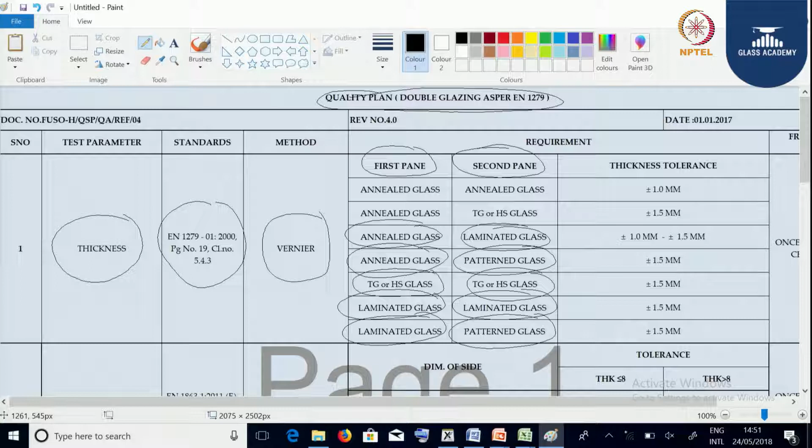As it is a double glazing unit, it consists of a minimum of 2 panes of glasses, the first pane and the second pane. The panes of glasses can be either annealed, toughened or HS, annealed or laminated glass, annealed or patterned glass, toughened or HS, toughened or HS glass laminated with laminated glass, or laminated and patterned glass. So the combination of panes can be any.

So here we need to understand thickness tolerance. When the glass is of annealed combination, the overall thickness allowed is plus or minus 1 mm. When the glass combination is annealed and toughened or HS glass, the overall thickness tolerance is plus or minus 1.5 mm.

When the glass combination is annealed and laminated glass, the thickness tolerance shall be plus or minus 1 mm to plus or minus 1.5 mm. When the glass combination is annealed and patterned glass, the thickness tolerance is plus or minus 1.5 mm.

When the glass combination is toughened or HS glass and toughened or HS glass, the thickness tolerance is plus or minus 1.5 mm. When the combination is laminated glass plus laminated glass, the thickness tolerance is plus or minus 1.5 mm. When the combination is laminated glass and patterned glass, the thickness tolerance is plus or minus 1.5 mm.

The frequency of testing shall be once every 2 hours or every changeover. Whenever there is a change of thickness, we need to recheck the thickness of the overall DGU.

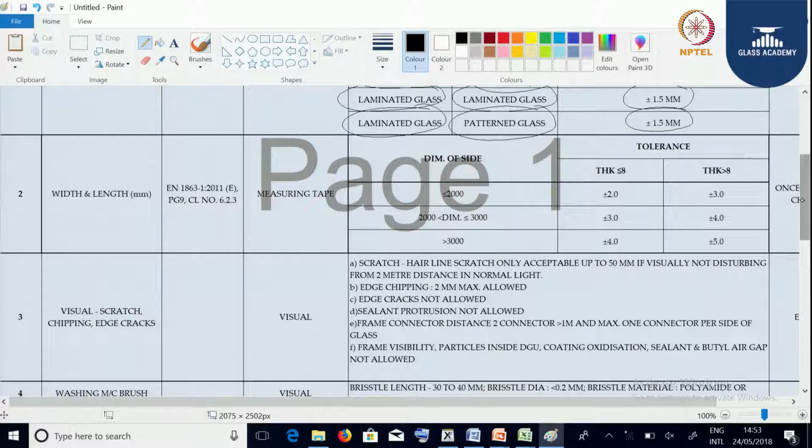Next, the second parameter is length and width. That is similar to the pre-process or tempering standard, EN1863 or EN12150. Visual inspections like scratches, chipping, and edge cracks are all applicable as per the pre-process and tempering standards.

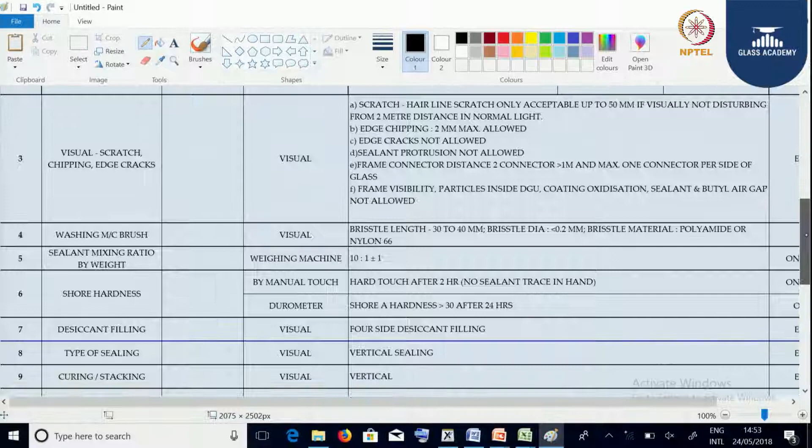Here we need to understand a few parameters, that is the washing machine brush quality. We need to check the sealant mixing ratio, measured with respect to volume and by weight, 10:1 plus or minus 1.

We need to check a few test parameters, like the shore hardness test. The tool we use is the shore hardness meter, or durometer as we call it, and if it is a single part component, we use the manual touch method.

Next we need to check the desiccant filling, and in a particular linear meter of spacer how much desiccant we need to fill, and in all edges we need to fill it. The type of sealing we are using, whether it is vertical or horizontal sealing. Curing, and what is the stacking, that we need to address.

What is the delta T, that is the temperature difference, that we need to understand, and everything will be undergoing through the lab tests that are coming in the later sessions.

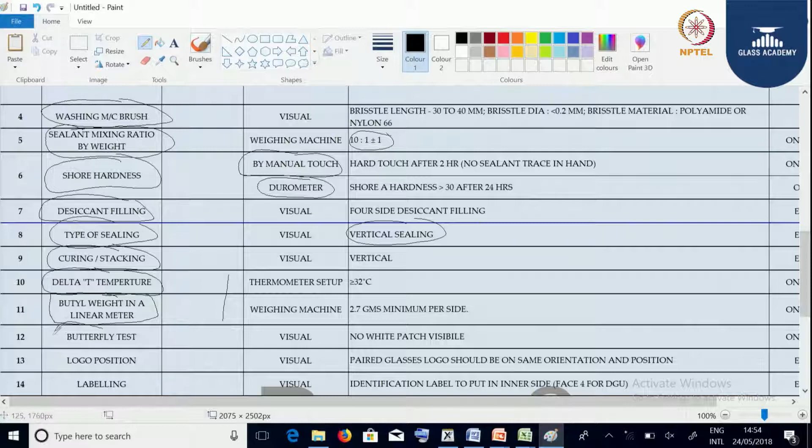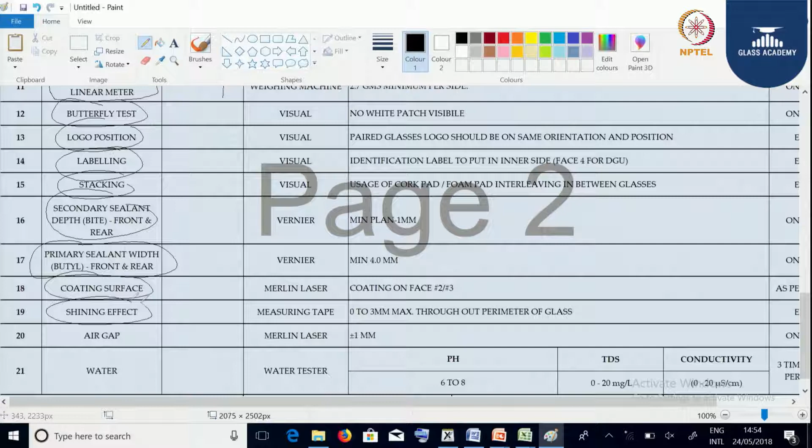We need to check the butterfly test. Next we need to see the secondary sealant depth. We need to see how we are stacking, what is the labeling position, what is our logo, where we are using the logo. Primary sealant butyl, how you are keeping it front and rear, coating surfaces, shining effect because of edge deletion, air gap, water - all these parameters we need to keep in mind when processing a double glazing unit.

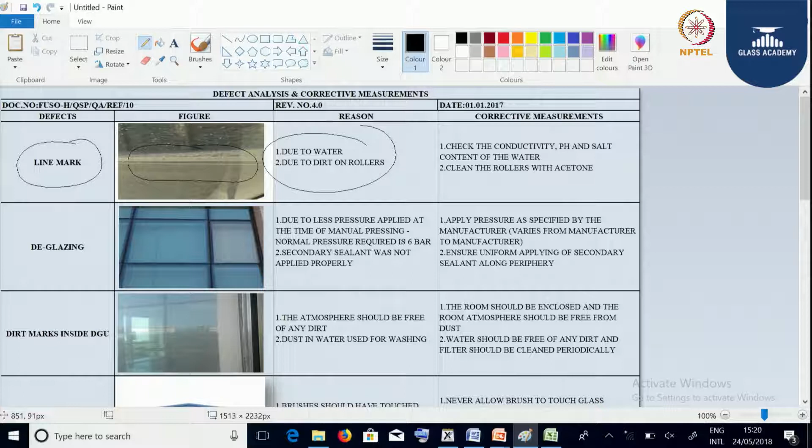Now we are going to see the defects that arise in the DGU process, that is double glazing unit. We can see the defect of line marks, meaning lining on the glass surface. The reason is poor water quality or dirt on the rollers. We can overcome this issue by checking water parameters like conductivity, pH and salt content, and cleaning the rollers with acetone on a regular basis.

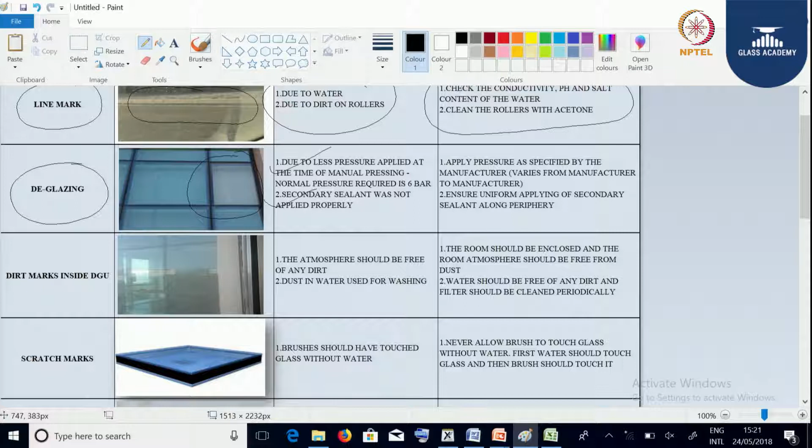Next defect is deglazing, meaning the two glasses got separated. You can see in the figure one of the glasses has fallen down. The reason is due to less pressure applied at the time of manual pressing - normal pressure required is 6 bar - and the secondary sealant was not applied properly. We can overcome these issues by applying pressure as specified by the manufacturer, and ensuring uniform application of secondary sealant along the periphery of the glass.

You can see the dirt marks inside the DGU in the figure. The reason being the atmosphere should be free from any dirt or dust, and the water used for washing should be clean. We can overcome these issues: the room should be clean and enclosed, room atmosphere should be free from dust, water should be free of any dirt, and the filter should be cleaned periodically.

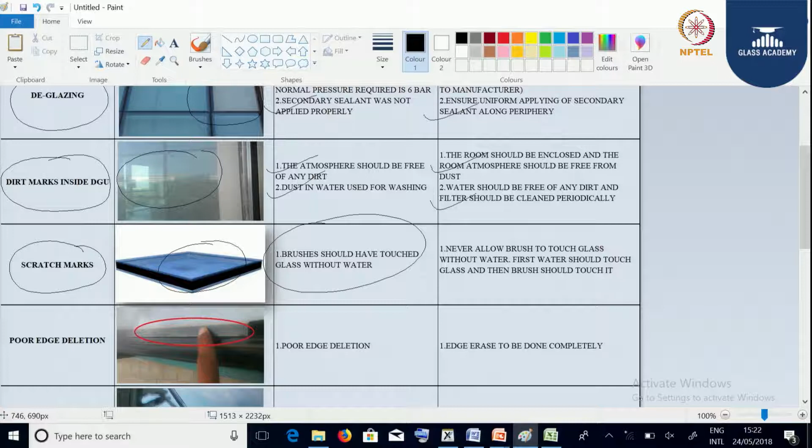Next you can see the scratches on the glass surface. This is because the brushes have touched the glass without water. We can overcome this issue by never allowing the brush to touch the glass without water. First water should touch the glass, and then the brush should touch the glass.

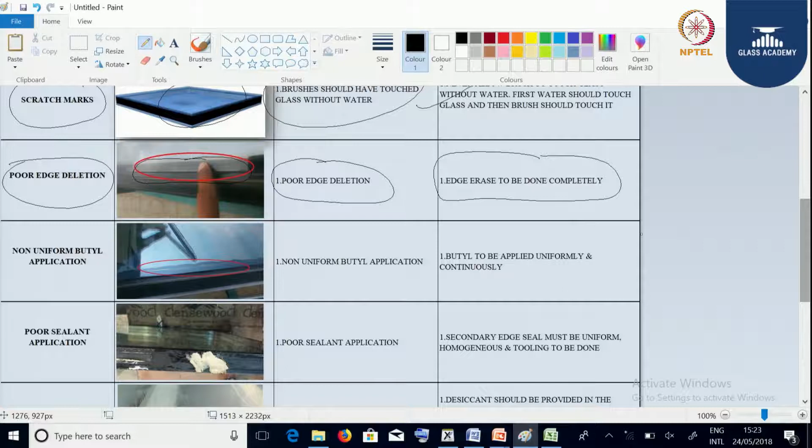Next one is poor edge deletion. You can see in the figure that the edge deletion we have done on the glass is not complete. If there is poor edge deletion, you can see traces of the coating. Our intention is that the coating surface should be completely removed and the surface should be as clear as plain glass. This happens because of poor edge deletion, and we can overcome this issue by properly doing the edge deletion with the proper wheel and proper pressure.

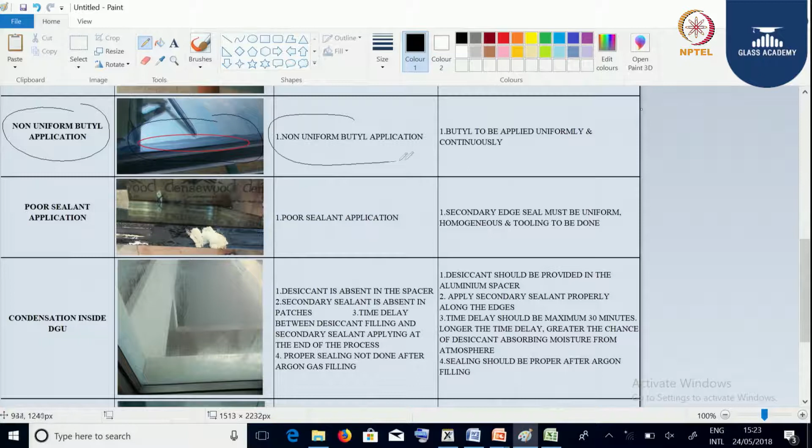Next one is the non-uniform butyl application. You can see in the figure the butyl is like a zigzag line. Always the butyl should be straight and continuous, since the butyl acts as a moisture barrier. The reason is the zigzag line, due to non-uniform butyl application, and we can overcome this issue by applying butyl uniformly and continuously.

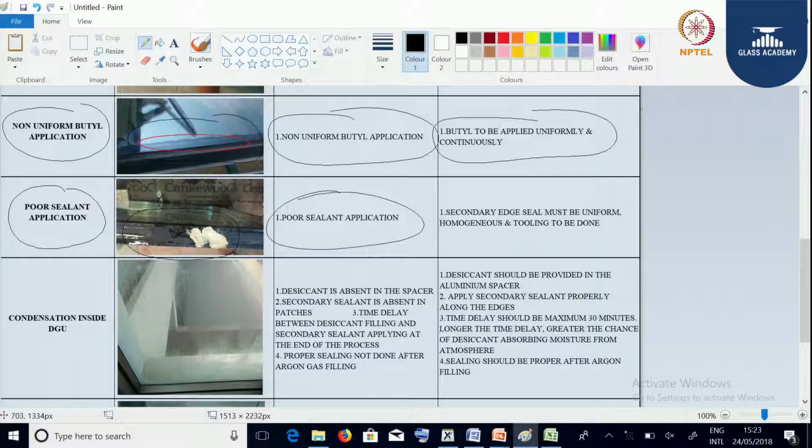Next defect we are going to get in the DGU is poor sealant application. You can see there is insufficient depth or a continuity missing in the sealant. The reason is poor sealant application. We can overcome this issue by maintaining a proper edge seal, ensuring uniformity, and tooling to be done once the pasting is done.

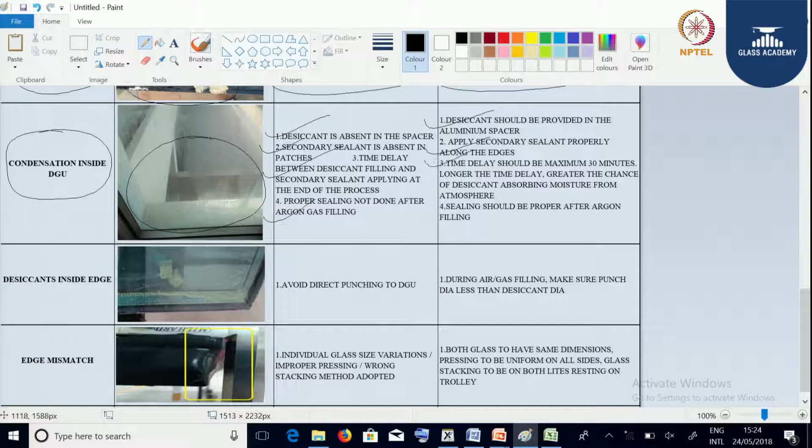Next defect we are going to get is condensation inside the DGU, that is, moisture trapped inside the DGU. The reasons are: desiccant is absent in the spacer, or secondary sealant is absent in patches, or there is a time delay between the desiccant filling and the secondary sealant applying at the end of the process, or proper sealing is not done after argon gas is filled. We can overcome these issues by ensuring desiccant is provided in the aluminum spacer, applying secondary sealing properly along the edges, keeping the time delay to a maximum of 30 minutes - the longer the time delay, the greater the chances of desiccant absorbing moisture from the atmosphere - and ensuring sealing is proper after argon gas is filled.

The next defect you are going to get is desiccants inside the DGU. You can see here the desiccants have fallen inside the DGU. The reason is direct punching to the DGU should be avoided. Generally whenever we go to any glass having desiccant inside, the major cause is that the DGU got drilled, so we need to avoid direct drilling of the spacer. We can overcome this issue by air or gas filling, and making sure that the punch diameter is less than the desiccant diameter.

Next defect you can see is the edge mismatch. You can see with the right angle there is an offset of the edge in the figure. The reason is individual glass size variations, improper pressing, or wrong stacking method adopted. You can overcome this issue by ensuring both glasses have uniform dimensions, pressing is uniform on all sides, and glass stacking is uniform, resting uniformly on the trolley.

So now we will be starting the various tests that are applicable for an insulating glass unit. Let us start with the butterfly test. The butterfly test we perform on secondary sealant. The secondary sealant is available in three forms in the market: insulating glass unit, structural glazing unit, and weathering sealant.

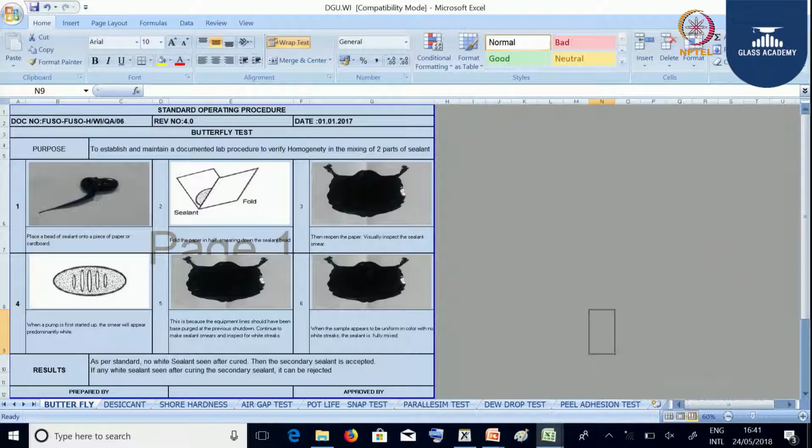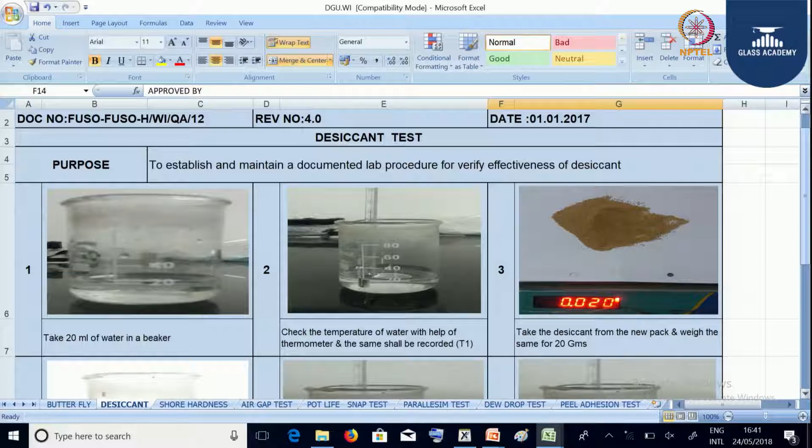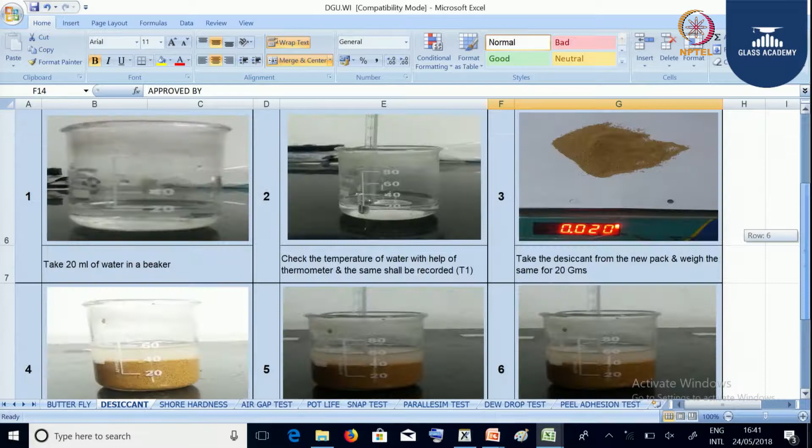Next is the desiccant test, used for the desiccant inside the spacer that absorbs moisture. First we take 20 ml of water in a beaker and measure its temperature. Then we take 20 grams of desiccant and pour it into the water, checking the temperature after the desiccant is added.

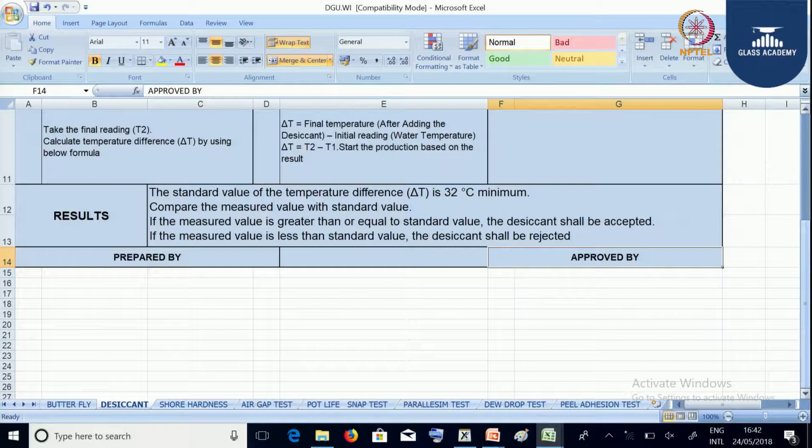Within a fraction of seconds, the temperature will rise. Then we calculate the temperature difference: the temperature after adding the desiccant minus the initial water temperature gives the desiccant temperature. It should be a minimum of 32 degrees centigrade, which is the standard acceptable value.

Next, the shore hardness test, used to check the hardness of the secondary sealant. The procedure is to take a 2-part sealant into a 100 by 100 mm square plate with a 10 mm thick layer, apply the secondary sealant over that 100 by 100 mm area, and after 24 hours of production, check the hardness.

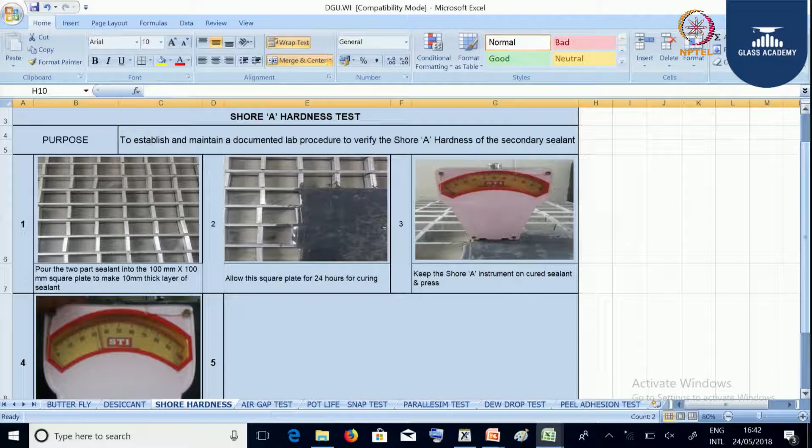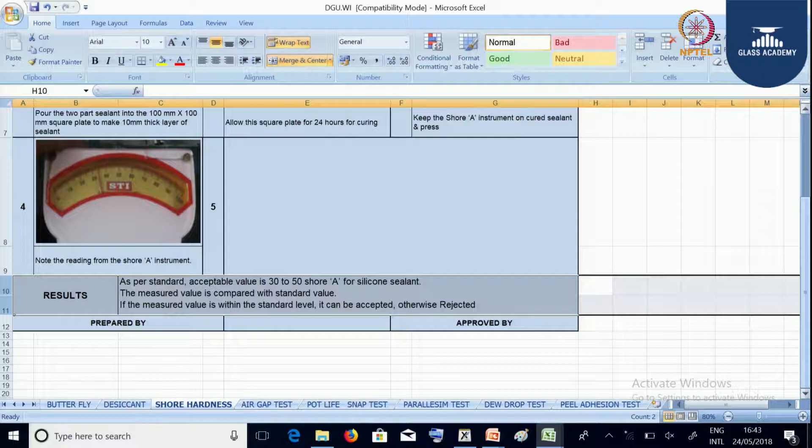We keep the shore hardness tester on the sealant and measure the reading. If you get more than 30, it is a good sealant. As per the standard, the acceptable value is 30 to 50 shore for secondary sealant. If the value is below that, it still requires curing, and if higher, there's a chance the sealant becomes sticky. Secondary sealant should act like a rubber material.

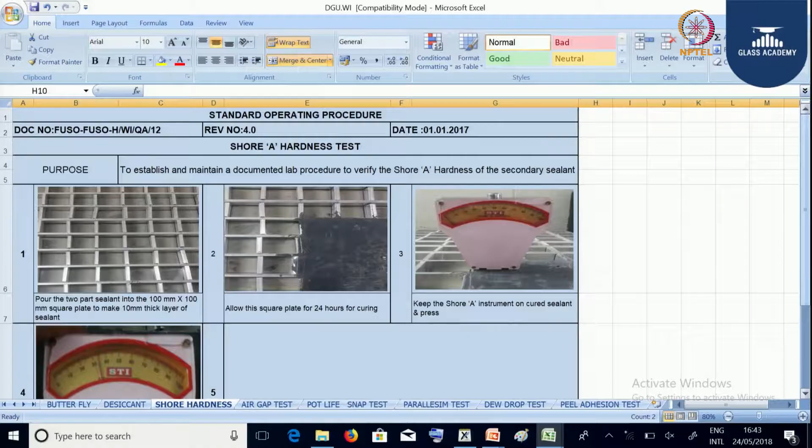Next is the pot life test, also known as the snap test. This test is done to check the curing. The snap time determines the curing time and curing rate, and this test is used to establish that.

The procedure is: first we take a cup, apply sealant inside it, and insert a spacer into the cup. We try to remove the spacer every 5 minutes. At a particular time, it will not come out.

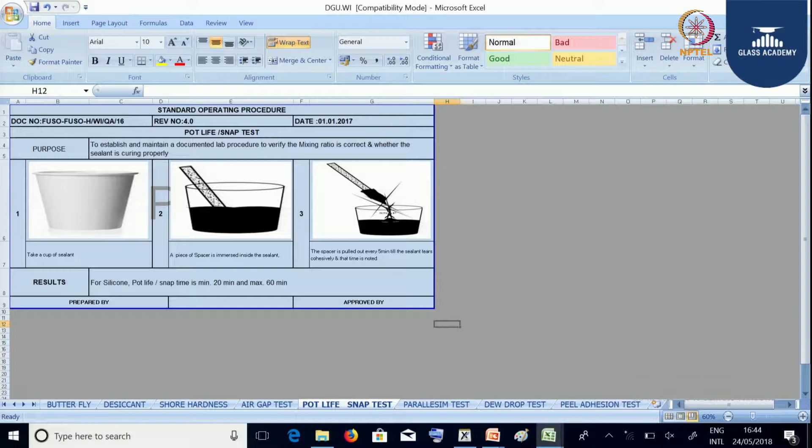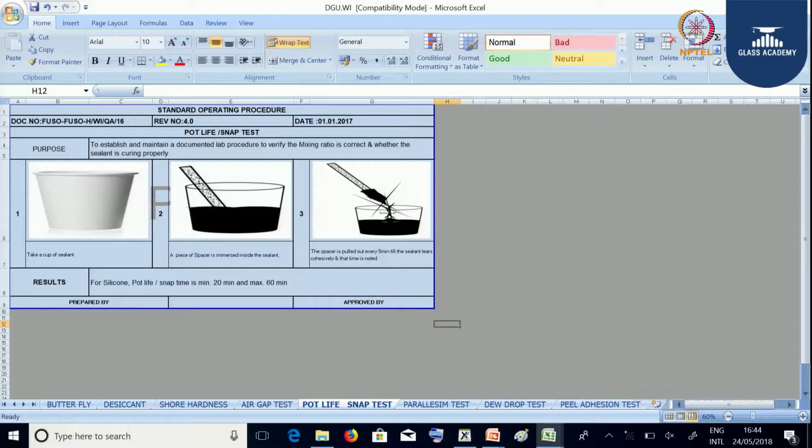We need to check whether it is a cohesive failure or adhesive failure, and at what time. If it is tearing within itself at a particular time, we note that time down. For silicone, the snap time should be a minimum of 20 minutes and a maximum of 60 minutes. Basically, the snap time determines the curing time between the glass and the spacer.

Next is the parallelism test, used to measure the overall thickness of the DGU. We place the DGU vertically and measure the thickness of the glass at the edges or at the center of the four edges.

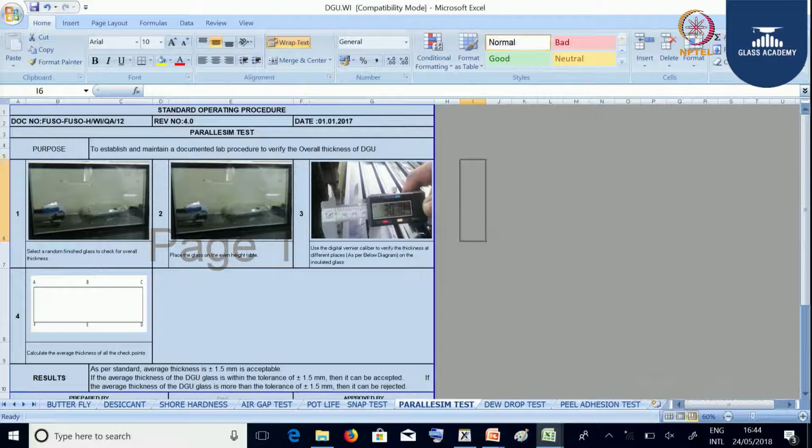Generally, the thickness of the glass includes the individual glass thicknesses and the air gap the DGU covers. As shown in figure 4, we measure the overall thickness at points A, B, C, D, E, F. As per the standard, the thickness difference shall be plus or minus 1.5 mm, which is acceptable.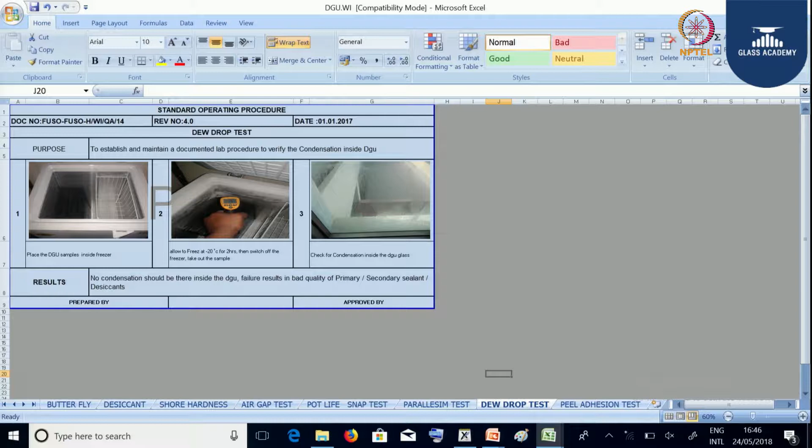So for the dewdrop test, we need to find out 3 things. In the result, no condensation should be there inside the DGU. Failure shall result in bad quality of the primary sealant, secondary sealant, and the desiccants.

Now we'll understand the tests performed for the insulating glass unit or double glazing unit. Generally, a double glazing unit is a combination of two glasses with an air gap in between. As we assemble two glasses with the air gap, the DGU glass acquires insulation properties with respect to heat and sound, thereby giving energy conservation parameters.

In insulating glass, apart from the glass itself, there are many components which make up the DGU glass. Now we'll understand each one, its importance, and how all these parameters contribute to the combination of DGU, helping in durability and performance.

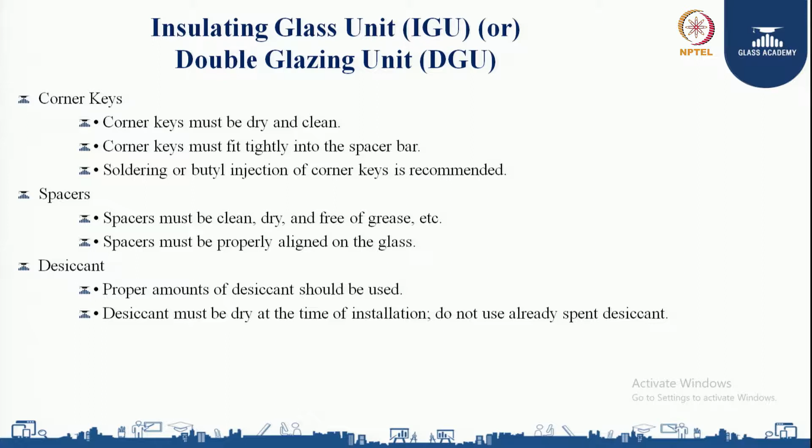Glass: the glass surface must be properly cleaned and free from fingerprints. Proper maintenance of glass cleaning equipment and solution is essential. Glass lites should have no edge defects or inconsistencies, and must be properly aligned with the spacer.

Now let us understand PIB, polyisobutylene, the primary seal. The primary seal must be applied in a continuous, uninterrupted bead free of voids or skips. No excess PIB should protrude into the secondary seal cavity. The primary seal must be uniformly and sufficiently pressed to give an even thickness and good adhesion to the glass and spacer surfaces.

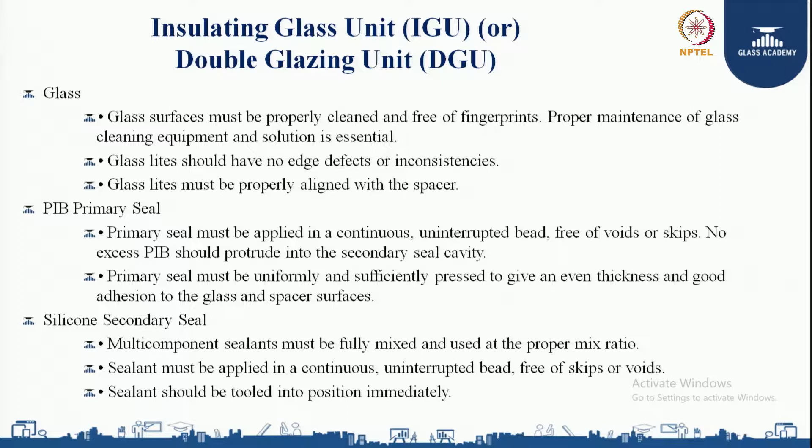Silicon, the secondary seal: multi-component sealants must be fully mixed and used at the proper mixing ratio. The sealant must be applied in a continuous, uninterrupted bead free of skips or voids, and must be tooled into position immediately.

Now we'll see what is meant by bite. Bite is the area that has to be edge removed, or the depth of the silicon. The bite gives structural strength with respect to wind pressure, thermal deflection, and dead load or self-weight of the glass. So basically the silicon gives structural strength to the DGU product.

Now this is how we calculate the bite. Using the appropriate mathematical derivation, the following calculations determine the structural sealant bite, which holds the IG unit to the curtain wall mullion. Structural sealant bite, in inches, equals half of the smallest leg of the largest lite, times wind load, divided by sealant design strength. For IGU sealant bite, it is 50% of half of the smallest leg of the largest light, times wind load, divided by sealant design strength. This is the formula for the sealant bite calculation with 50 by 50 load sharing.

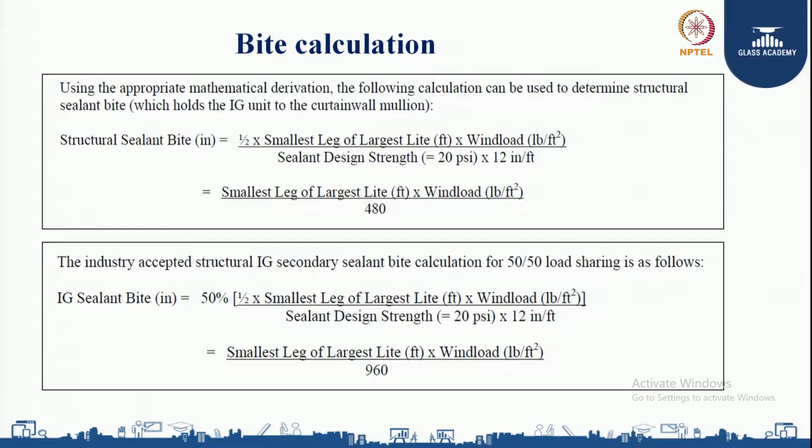Now we'll understand each test one by one, what we do in DGU glass.

Butterfly test. When you talk of a secondary sealant, it is the sealant we use to make the insulating glass unit. It is a two-part component, a mixture of base and hardener. So we need to have a proper mixing of the base and hardener, and that is ensured through the butterfly test. The purpose of the butterfly test is to verify the homogeneity in the mixing of the two parts of sealant.

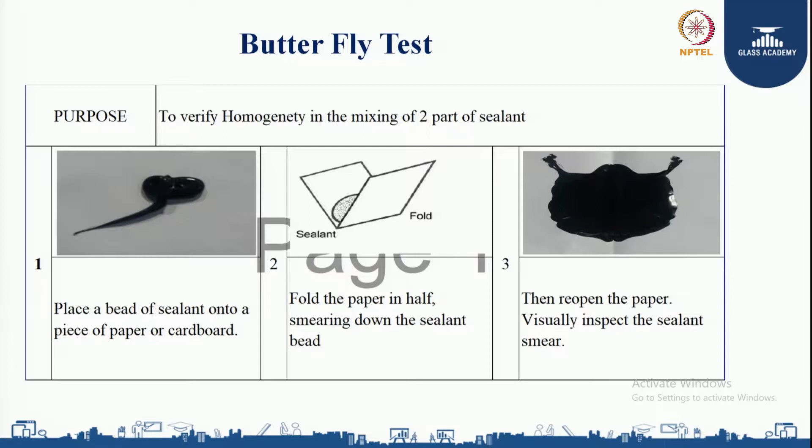Place a bead of sealant onto a piece of paper or cardboard, then fold the paper in half, smearing down the sealant bead, reopen the paper and visually inspect the sealant smear. When a pump is first started up, the smear will appear predominantly white, because the equipment lines should have been base purged at the previous shutdown.

Continue to make sealant smears and inspect for white streaks. When the sample appears uniform in color with no white streaks, the sealant is fully mixed. The butterfly test should be performed with multi-component sealants at least every time a pump is started, if not intermittently throughout the day's production. As per the standard, if no white sealant is seen after curing, the secondary sealant is accepted. If any white sealant is seen after curing, the secondary sealing is rejected.

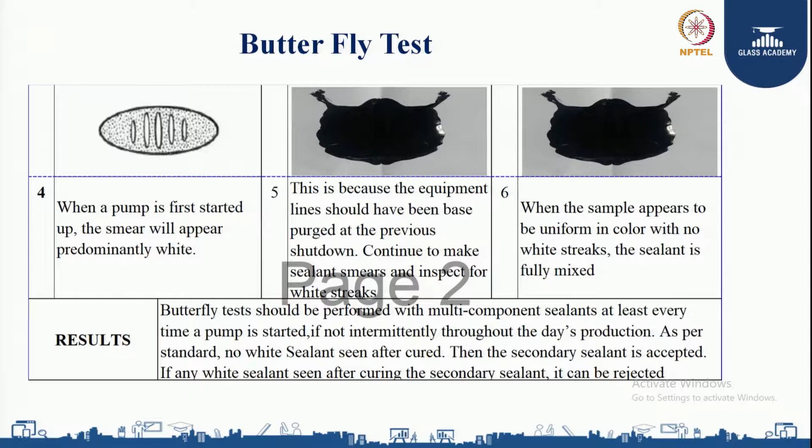Next is the desiccant test or molecular sieve test. The purpose of this test is to establish and maintain a documented lab procedure for verifying the effectiveness of the desiccants. The purpose of desiccant is to absorb the moisture inside the DGU.

In order to check whether the desiccants are in a position to absorb the moisture or not, first we take 20 ml of water in a beaker. Then the temperature of the water is checked with the help of a thermometer. It is recorded as T1.

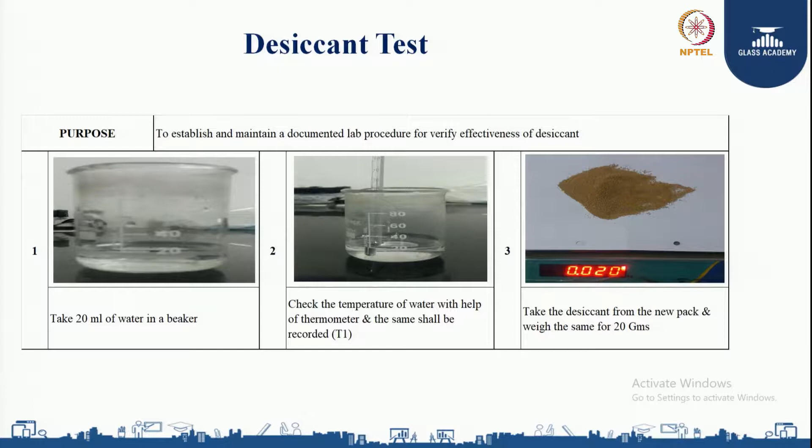Then we need to take desiccants weighing 20 grams. Immediately add these desiccants into the water and mix well. The temperature should rise more than 50 degrees centigrade within 2 to 3 seconds. Take the final reading, that is T2. Calculate the temperature difference using the formula: delta T equals the final temperature after adding the desiccants minus the initial water temperature, that is delta T equals T2 minus T1.

Start the production based on the result. The standard value for the temperature difference is 32 degrees centigrade minimum. Compare the measured value with the standard value.

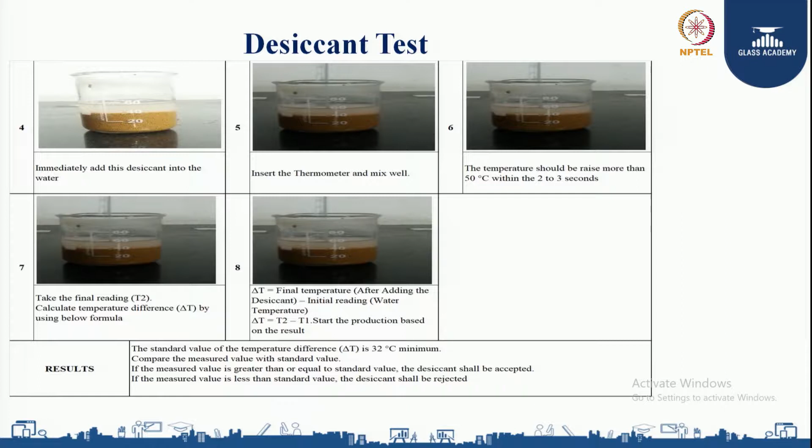For example, if my room temperature is 25 degrees centigrade and my desiccant temperature comes to 75, then 75 minus 25 gives delta T of 50 degrees centigrade, and the minimum required is 32 degrees centigrade. If the measured value is greater than or equal to the standard value, the desiccants shall be accepted as being in a position to absorb moisture. When the measured value is less than the standard value, the desiccant shall be rejected.

Next is the shore hardness test. Through this test, we are ensuring the hardness of the secondary sealant. The purpose of this test is to check the hardness of the secondary sealant. What we do is pour the two-part sealant into a 100 mm by 100 mm square plate to make a 10 mm thick layer of sealant.

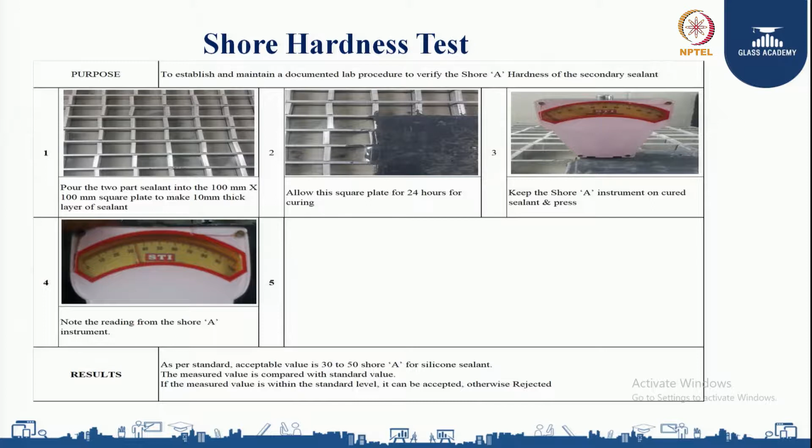Allow the square plate 24 hours of curing. Keep the Shore A instrument on the cured sealant and press, then note the reading from the instrument. As per the standard, the acceptable value is 30 to 50 Shore A for silicon sealant. The measured value is compared with the standard value. If the measured value is within the standard level, it can be accepted; otherwise, it is rejected.

Next test is pot life or snap test. This test is performed to verify the mixing ratio is correct and whether the sealant is curing properly. The procedure is, first take a cup of sealant, then immerse a piece of spacer inside the sealant. The spacer is pulled out every 5 minutes until the sealant tears cohesively, and the time is noted. For silicon, the pot life or snap time is minimum 20 minutes and maximum 60 minutes. So through this test, we are ensuring the curing time.

Next is the parallelism test. The parallelism test is used to check the overall thickness of the DGU.

As the DGU is a combination of two glasses with the aluminum spacer, we need to ensure the overall thickness of the DGU, and that we are going to ensure through parallelism test. First, we take a DGU finished product and place it vertically.

Then using the digital vernier caliper, we measure the thickness at the center of the 4 edges. As we can see in the figure, A, B, C, D, E, F, we take the average thickness. As per the standard, the allowed average thickness tolerance is plus or minus 1.5 mm. If the average thickness is within this tolerance, it is accepted; if more, it is rejected.

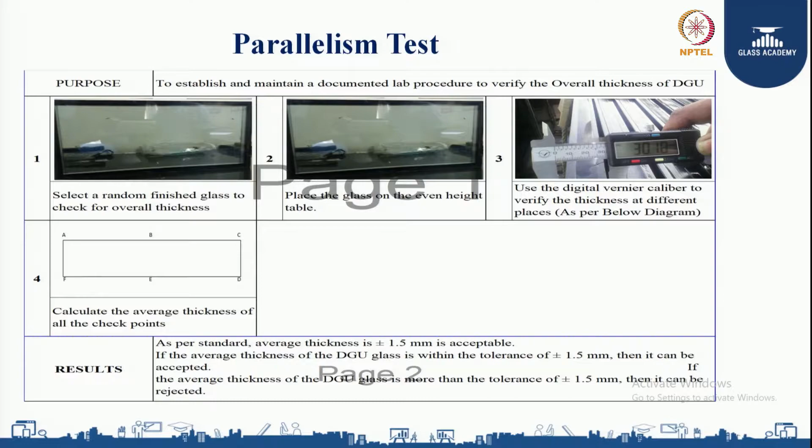Next is the dew drop test, which we do to check the condensation inside the DGU.

We take a DGU sample and keep it inside the freezer at minus 20 degrees centigrade for 2 hours, then take out the DGU sample from the freezer and check for condensation.

Condensation can happen either on the outside surface, inside surface, or in between the DGU. Outside or inside condensation can be wiped out, whereas condensation in between the DGU is not okay. In that case, we need to check the primary sealant continuity, secondary sealant curing and hardness, and whether the butyl and desiccant are able to absorb the moisture. There should be no condensation inside the DGU for it to pass.

Failure results from bad quality of primary sealant, secondary sealant, and desiccant. You can see in figure 1 the DGU glass placed inside the freezer, where it is frozen at minus 20 degrees centigrade for 2 hours, then taken out to inspect for any condensation inside the DGU.

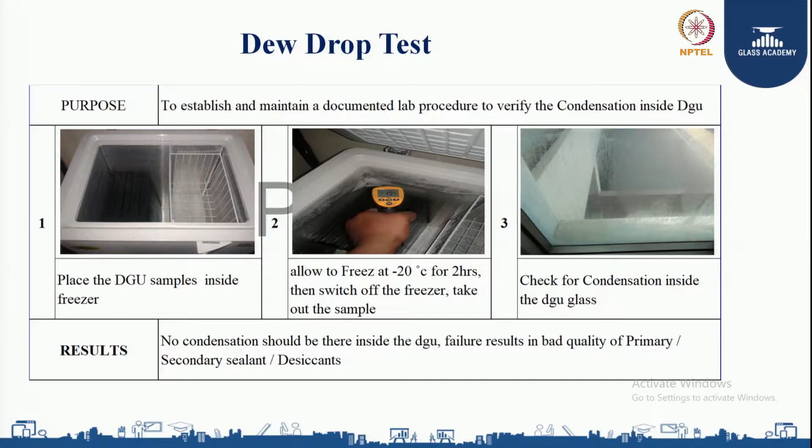Next is the silicon peel adhesion test. Its purpose is to ensure the bonding or adhesion between the glass, silicon, and the spacer, so that the sealant gives acceptable adhesion to the glass and spacer surfaces.

The procedure is to apply a bead of silicon sealant to the clean spacer surface, allow the sealant to cure for a specified time, then pull out the sealant and visually inspect the mode of sealant failure.

You can see in the figure, when I try to pull back at 180 degrees, the sealant separates from the glass sample - this is an adhesive failure. In figure B, there is a cohesive failure where the sealant tears within itself.

An adhesive failure is a bad sign, whereas a cohesive failure is recommended. In the results, cohesive failure - where the sealant tears within itself and remains adhered to the substrate - is desirable versus adhesive failure, where it completely pulls away from the substrate.

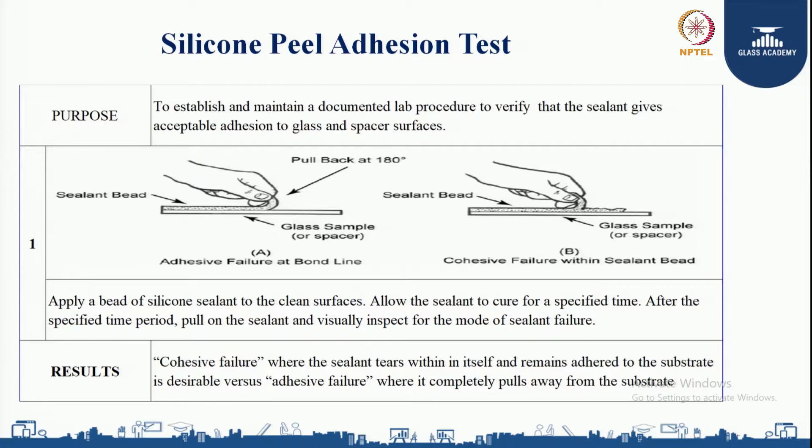Next test is the glass thickness test and air gap test. As the DGU glass is a combination of minimum 2 glasses with an air gap, the air gap tester helps us determine the thickness of individual panes as well as the air gap in between the DGU.

With the help of the Merlin laser air gap tester, we place the equipment on the glass surface to identify the measurements. I place this equipment on the DGU glass, and once I press the button, I get a minimum of 4 lights which indicate surface 1, surface 2, surface 3, surface 4.

When measuring from the first line from right to left: the first line to the second line indicates the glass thickness, the second line to the third line indicates the air gap between the DGU, and the third line to the fourth line indicates the second glass thickness.

So through this air gap tester, you can check glass thickness as well as the air gap inside the DGU. This equipment can also measure the coating surface, and if any PVB layer is present, that can be traced through this equipment too.

If it is a single glazing unit, you get 2 surfaces, thereby 2 lines. If it is a double glazing unit, you get 4 surfaces, thereby 4 lines. If it is a laminated DGU, you get 6 surfaces, thereby 6 lines. If it is a double lami DGU, you get 8 surfaces with 8 lines. This is how you trace out the glass thickness as well as the air gap inside the DGU. This concludes all the tests that we do for a DGU glass make.

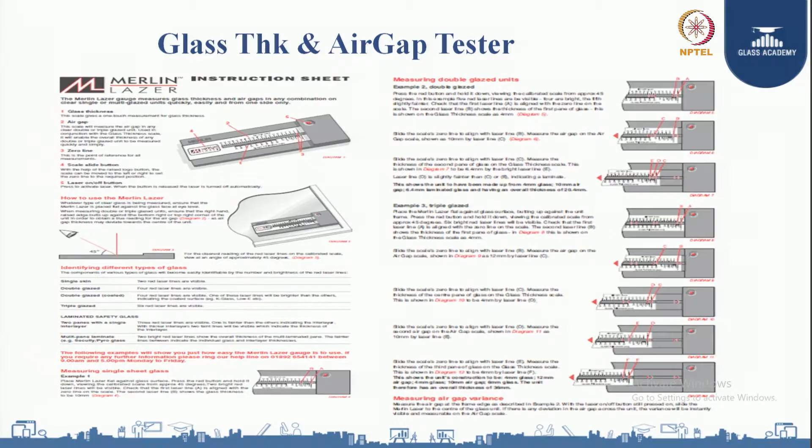Now, as we are using silicon, we have 3 types: structural silicon, insulating silicon, and weathering silicon. The silicon used in architectural systems is the insulating glass silicon.

This is a 2-part component, a mixture of base and hardener. This is known as the butterfly test, which determines the mixing ratio and homogeneity between the base and hardener. We take a paper and a small quantity of silicon, fold it, and properly squeeze it.

If we open it, this is how a butterfly test looks. By the shape itself, we can say it is a butterfly, like the wings of a butterfly. We need to check for any white patches inside the mixing. If there are white patches, the mixing is not okay. If there are no white patches, the mixing is okay.

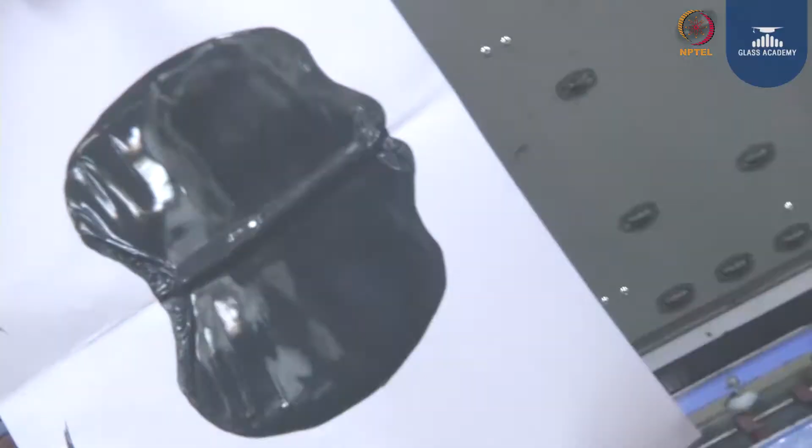We have one more test known as the skin over test. By placing your finger on the silicon, if you are able to feel the wetness after 2 hours, we need to inspect. If it is still sticking after 2 hours, there is a mixing ratio issue. If it is not sticking, the test passes.

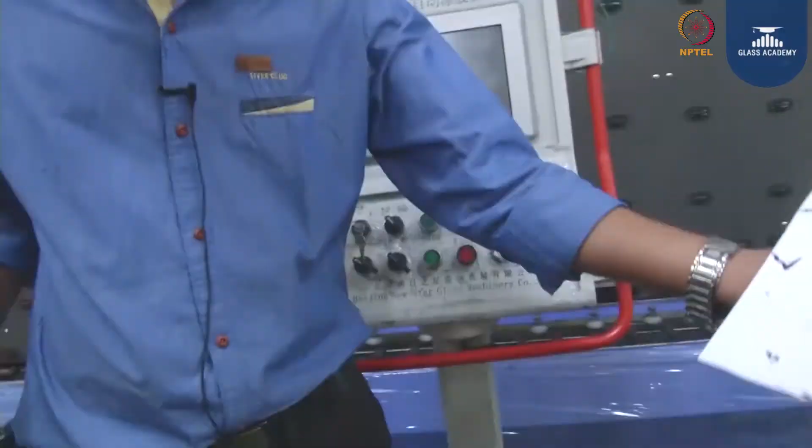This is one more test known as the pot life or snap test, where we take a cup and keep silicon inside it and immerse the spacer. Every 5 minutes we try to pull out this spacer, and at a certain time it will break cohesively.

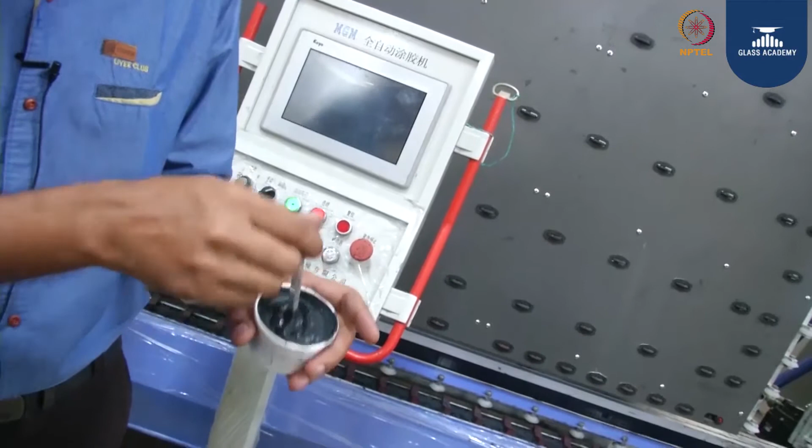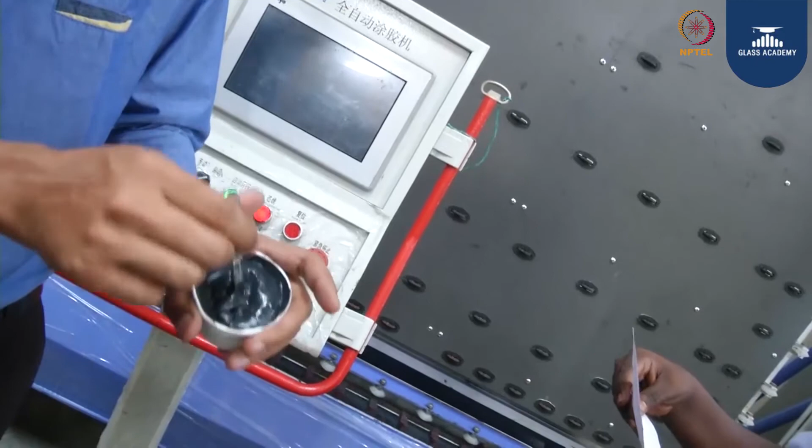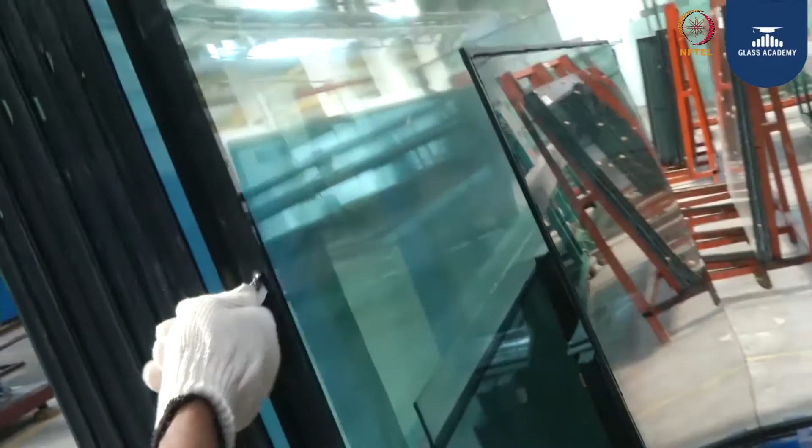Now we are going to do one more test known as the silicon peel adhesion test. This determines the bonding or adhesion between the silicon glass and the spacer. We cut a piece of silicon and try to pull it out. If the silicon comes completely off, that indicates weak bonding. If it comes off cohesively, breaking within itself, that indicates good bonding.

Now if you see here, it is not completely removed. Part of the silicon is still sticking to the glass as well as the spacer. This is known as the silicon peel adhesion test.

The silicon should always have an elongation property. When we cut it, it does not come off directly. Some part of the silicon is still adhering to the glass and the spacer. This shows that the bonding between the glass, spacer, and silicon is good.

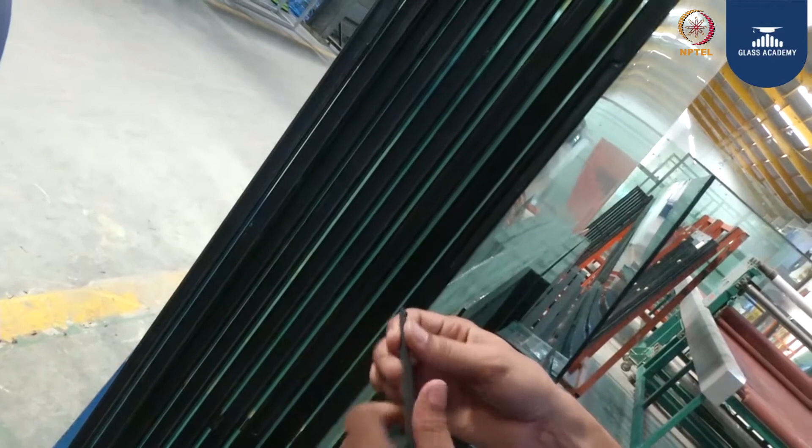Now you see, it is breaking like this, so there is no spacer visibility. As long as there is no spacer visibility and the silicon is sticking to the glass and the spacer, the silicon is of good quality.

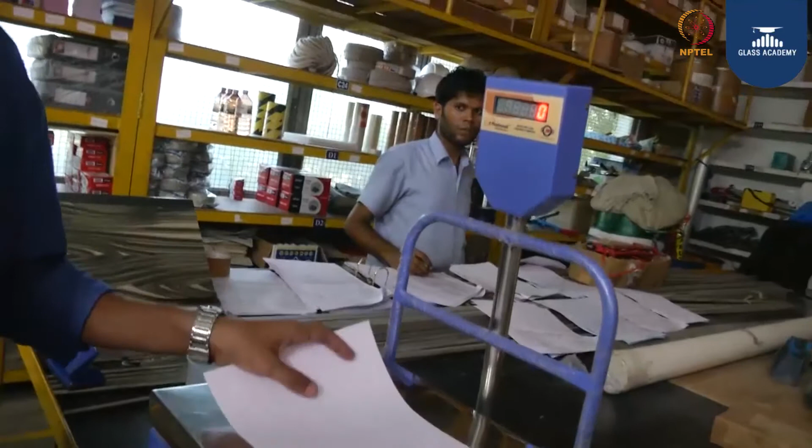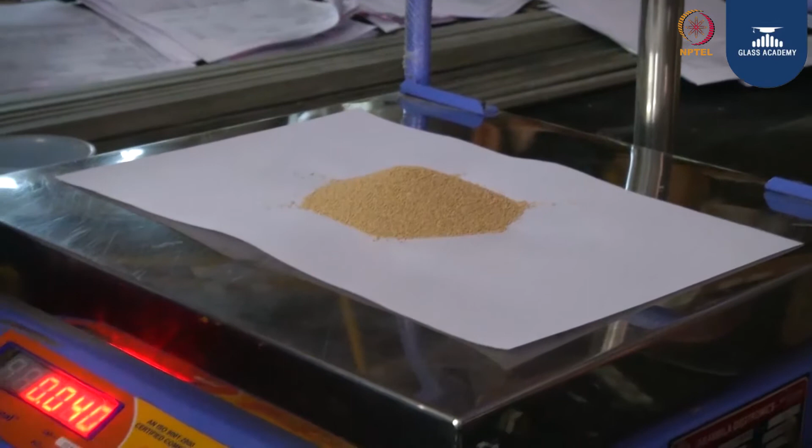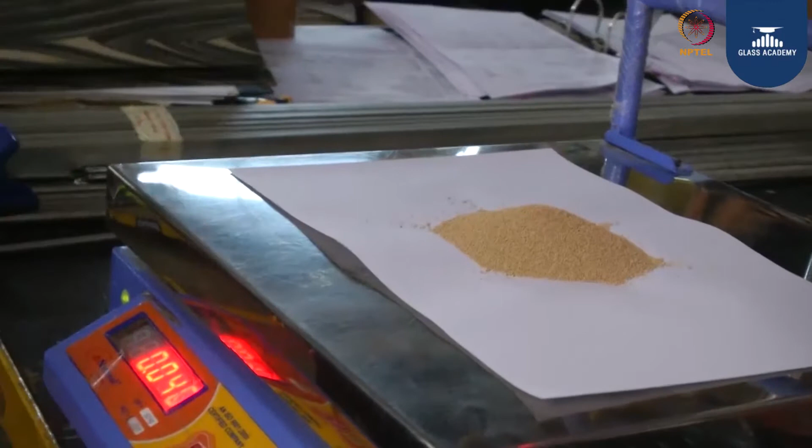Now we are going to perform a test known as the desiccant test or delta T test. We are going to take 40 ml of water and 40 grams of desiccants. With the help of a thermometer, we are going to measure the temperature of the water.

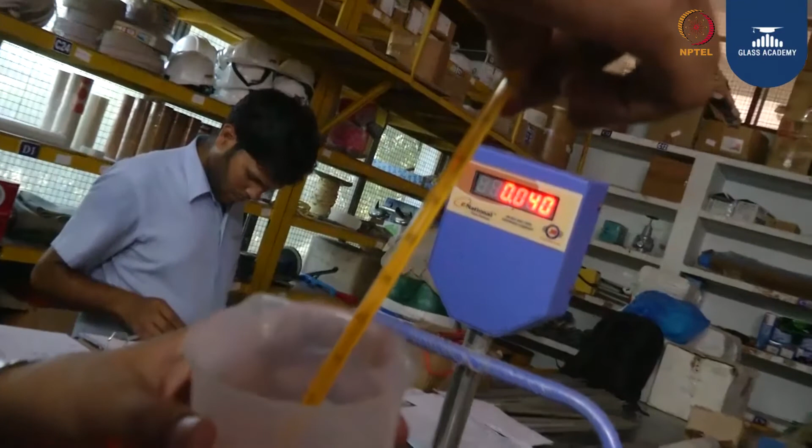You see the water temperature, it is 23 degrees centigrade. Note down 23 degrees centigrade as the initial temperature. Now we are going to place these desiccants inside the water. You see here, focus here.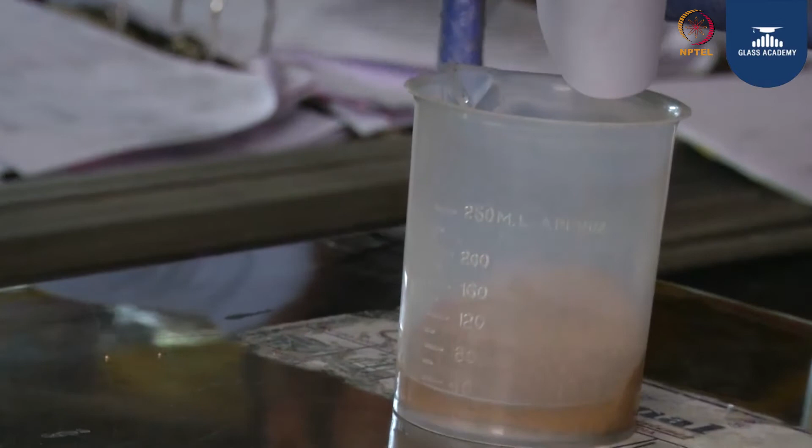You see, within a fraction of seconds, there is an increase in the temperature. Now the temperature is 65 degrees centigrade. So our delta T will indicate that is 65 minus 23, which is equal to 42 degrees centigrade. Minimum required is 32 degrees centigrade. So once the desiccants reach this, it shows the desiccants are in a position to absorb the moisture.

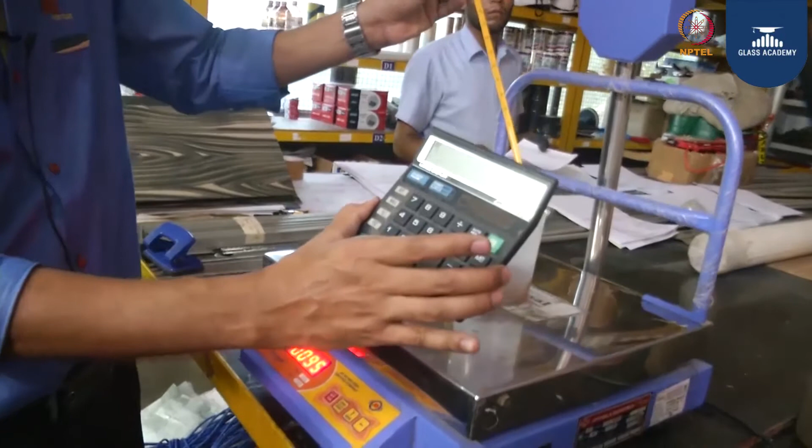Now this is one more test to determine the hardness of the secondary sealant, known as the Shore hardness tester. What we'll do is take a Shore hardness tester, take a silicon sample, and place it on a glass with spacers supporting it. Now we'll place this equipment on the silicon and see the hardness of the secondary sealant. You see it is coming 42. So the unit is 42 Shore A. The desirable reading is more than 20, it should be in between 20 and 60, where we are getting 42 Shore A. So this test will determine the hardness of the secondary sealant.

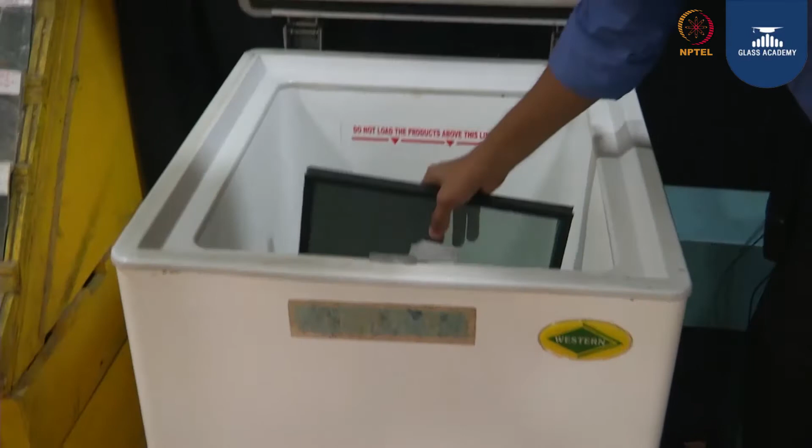Next, with respect to DGU we have seen butterfly, pot life. Now this is one of the in-house testing methods used to check the condensation or dew drop inside the DGU. The purpose of this test is to check the condensation inside the DGU. We'll take a DGU sample and place it inside the freezer at minus 18 degrees centigrade for 2 hours. Through this test we are making sure that under extreme negative temperatures how the DGU is going to perform. If at all any condensation is there inside the DGU, we check whether the desiccants are able to absorb the moisture, any discontinuity in the butyl, and whether the silicon is properly sealed or not.

So if you see, there is no condensation formed inside the DGU. This test will determine the properties and performance of the desiccant, how the butyl is acting as a barrier to the moisture, and how the secondary sealing is protecting the surface and giving structural strength to the glass.

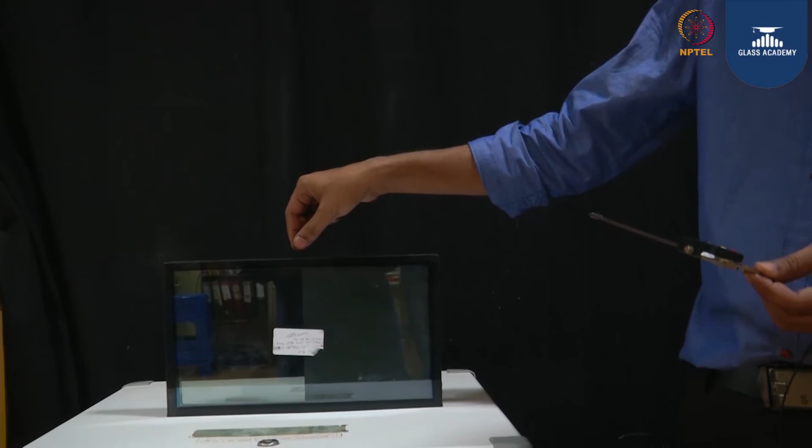Now we are going to see one more test related to the final product of DGU, known as the parallelism test. As the DGU is a composition of two glasses with an airspace in between, we need to measure the overall thickness of the glass, because the glass can be heat strengthened, toughened, or annealed, and in between there is an air gap as well.

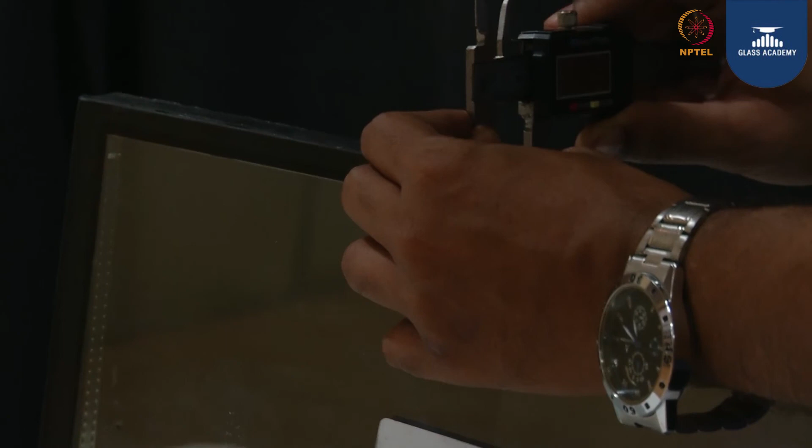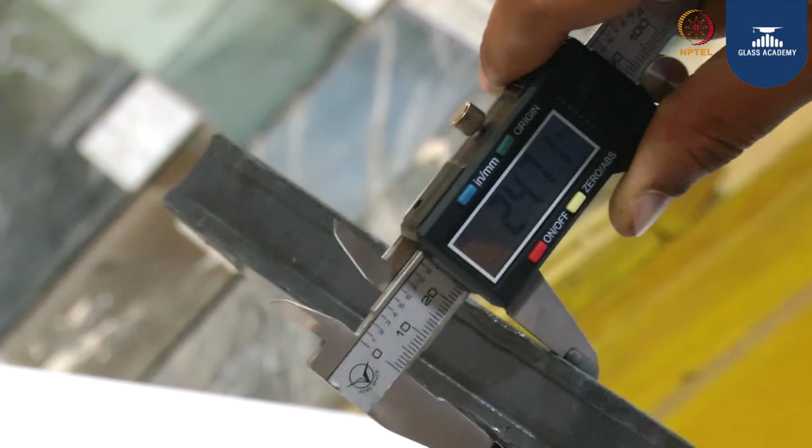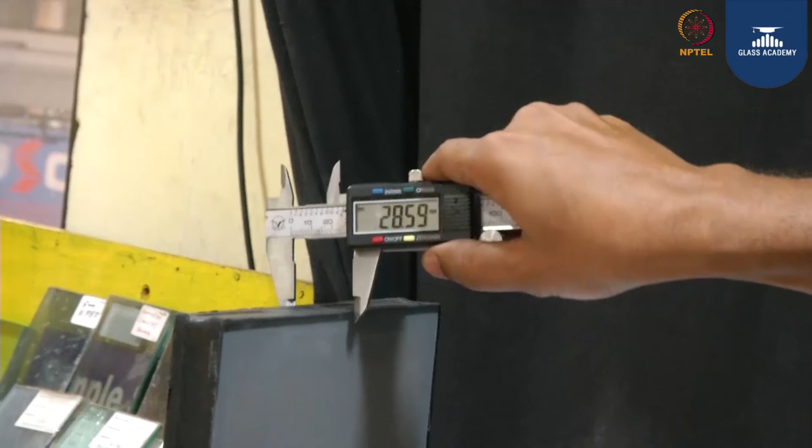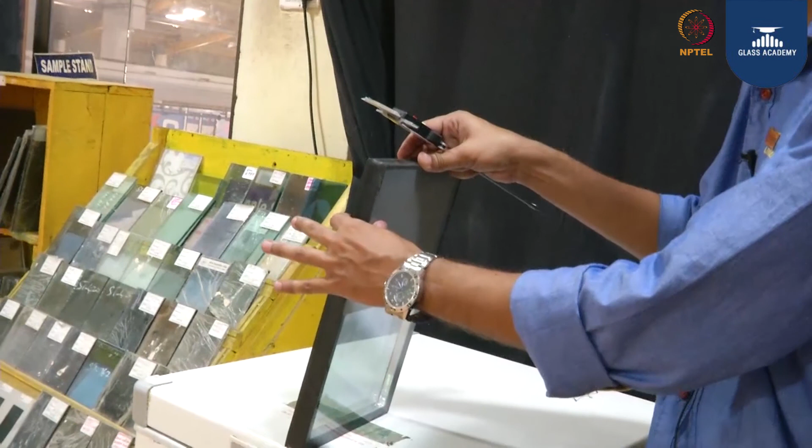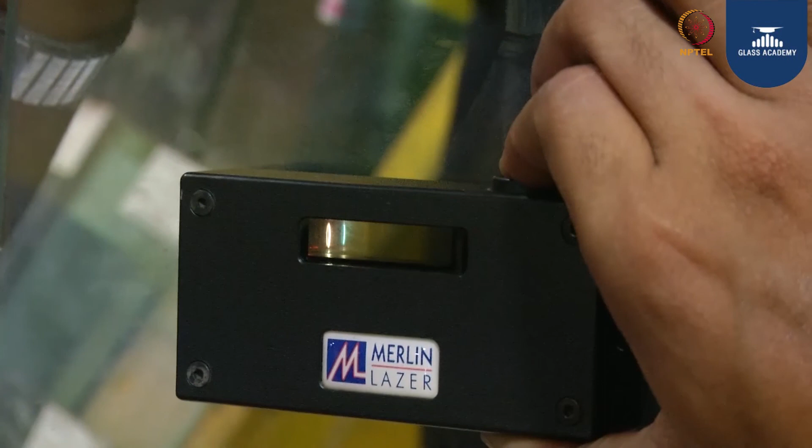Now this is one more equipment similar to GASP, known as the toughened glass indicator. We are going to see whether the glass has been heat treated or not with the help of this toughened glass indicator. I am placing the toughened glass indicator on the glass surface and moving it across the glass surface. We need to see whether there is any change in the color of the lighting. When I am moving across the glass, I am able to find there is a change in the color of the second line, which indicates the glass has been heat treated.

Now this is one more test to determine the properties of the base glass we get from a supplier, known as the visual light transmission test. If you see any glass like Saint Gobain, they will keep a remark as the nomenclature for a particular product, such as ST467. Here ST indicates it is a reflective glass, 4 indicates the color of the glass, which is green, and 67 indicates the light transmission, that is the visual light transmission in the glass. So through this test we are ensuring the light transmission in the glass is 67%.